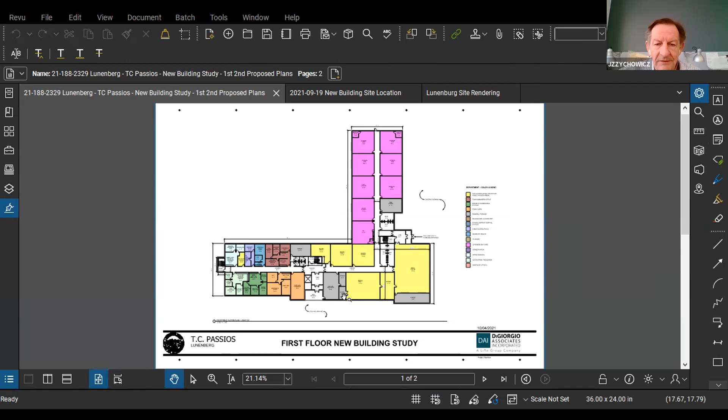Okay. So this is from the last time, we've got it drawn into the computer now. Got things tightened up a little bit. As we discussed last time, there were quite a few comments, but I was asked to focus on the low hanging fruit because we're trying to get an apples to apples comparison between the previous renovation of the school and this new building. So a couple things that we did add inside here: there was a request for a couple more bathrooms because these bathrooms here were going to be staff focused. So we added a couple more for the public side, so that if the public's down in the town area, there's a couple bathrooms here for the public. They don't necessarily have to walk all the way down to these larger rooms that support the meeting spaces. So we didn't add any extra square footage for that. We put them in, we slid the stairs over.

So this meeting room got modified a little bit, but it didn't affect the overall size of the building. So we did that on this level. And then we also did that up here on the second floor. We accommodated that. We turned the outdoor terrace that we had into additional storage to pick up some more storage area as suggested. Then I think that these were the only changes up here on the second floor.

Back downstairs, the majority of changes happened in the extended daycare wing. So what we did, we moved the ACE up front so that that adult program now is when you first come in off the entrance, the adult clientele can come right into this space. We added the bathroom, we added the kitchen that was shown in the previous plan. So now that happens right up front, separated from the children's program.

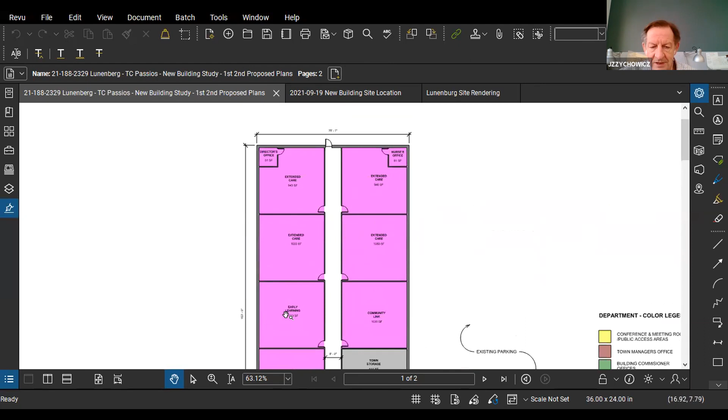2 of the rooms had office spaces within them. So now we're showing whether those are those 2 rooms or whether these office spaces need to be in these 2 rooms or whether eventually they all need an office space. I think the key is that we have all the 4 spaces here, all in one area. So it kind of goes adult, a buffer zone of storage, and then kind of the kids zone in the back. So we've made those revisions to the plan.

I started to go through and just kind of do a check. Right now, total building square footage, we're around 58,000 square feet on the 2 floors of the building. How many? Can you say that one more time? I'm sorry, say it again. Can you say how many square feet one more time? Oh, 58,000. Okay. Now I think we're pretty much spot on in the town. I think we're a little bit larger in some of these conference areas. So I can go back and trim some things up.

Like in this block right here, I know the Lions Club is too big, but this room is too small. And these 2 storage areas are a little undersized. So that's just a manipulation of these areas. I'll make this Lions Club a little smaller. I'll take some space out for storage and give the meeting room so we're a little more in balance with the previous plan. But I think overall square footage, we're okay. I can just fine tune this a little bit here.

This meeting room is a little bit smaller, but then the meeting rooms upstairs are a little bit larger. So I don't know how much you want me to go back and trim some of these things to match that original school building. Like I said, some of this is a matter of we're just stacking things now. So we have the square footage from the first floor to the upper floor. Like I said, I can go back and trim some things up.

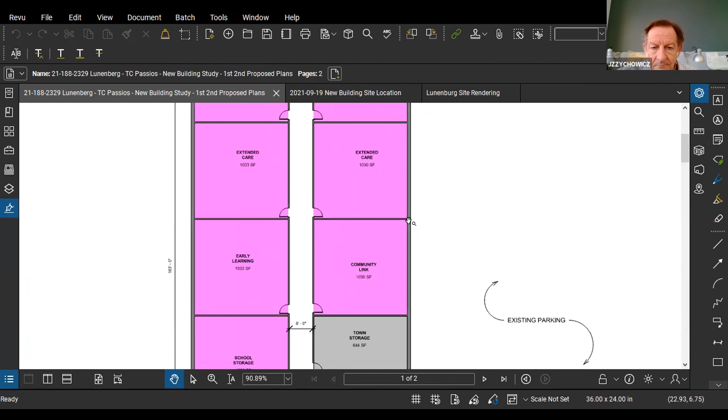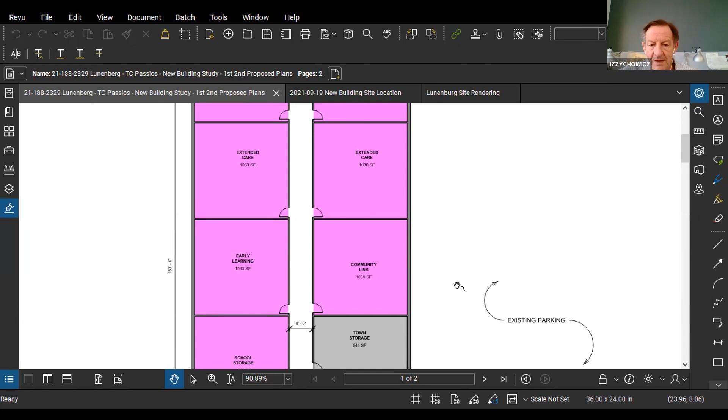And then the same in this wing, like this community link room, I think on the previous it was like 989. Now we're at 1030 just because of how we squared off the building. So, is it important to get that, say 40 square feet out? You can tell me and I can try to do that if you want. I can trim these things up a little bit to get it a little closer to apples. I mean, I think it's pretty close to apples, but that's a question, I guess, that we can discuss. So that's the updates on the building plan.

So why don't we have the discussion on the plans first before we move to the site. Okay, let me do this a little bit more systematically this time. I'll go through each person individually, so we're not doing a round robin thing. So in no particular order here, I'm just going to start at the top. Dave Passios, do you have any questions, comments?

Yeah, just an initial question. I'm assuming some of the extra square footage is because of stairwells and an elevator space that does not exist in a single story, three-wing building. Right. So, that's just part of the operation of this building and the configuration, I should say, of this building.

I understand the desire to shrink it down to probably closer to 55,000 square feet to match the other building. But there are some reasons why there's a little bit more in this design. And I'm not sure how much we would gain, but maybe shrinking all of the education rooms down so that wing is shortened, and then see if there's anything else that's doable, as we had a brief discussion about last meeting, about shortening the other wing also.

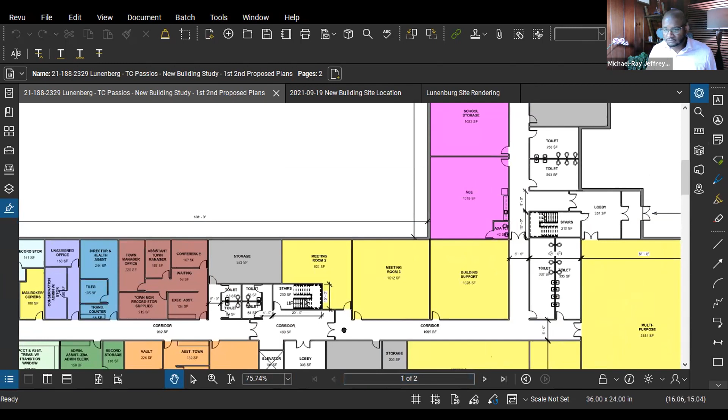And then the last comment is about staff toilets. So if we go to the education suite, one of the things. I'm sorry, do you mean the school offices? No, the ACE program and all the after school stuff. The purple. Yeah, the purple. So one thing that I think would need to come in here is inside of one of the extended day rooms and inside of the early learning classroom, a small bathroom.

And that would be a staff bathroom. Although there are boys and girls bathrooms in that part of the building, typically there's no mingling of adults going into bathrooms with children. And so in early ed, that way the staff can run to a bathroom and you don't lose your ratios. And then also just in general for there to be that staff bathroom in that wing. So in one of the extended daycare and in the early, would those be accessible from the hallway? No, accessible from inside the room. Inside the room, okay.

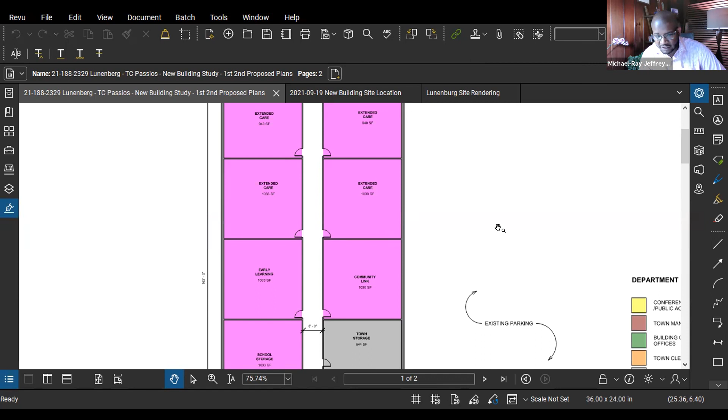So Michael, if I may, most of your suggestions really haven't changed the square footage. It's just shuffling adjacencies around a little bit. Correct. Yep, that's it. Otherwise, I really do think that the job you did here is quite phenomenal. It really is. I know that last meeting, it felt like we're all over the place. So I want to give you some strong kudos for being able to take all that info and put it together in a format here that makes a lot of sense. So thank you very much for that. No, thank you.

Okay, Brian, you are next. Thank you. I also really like the design. I didn't have any concerns. Okay. Dave Blatt. Okay, I understand the difference between the 58 and the 55. We had a long discussion last night and there was a big idea of apples and apples. So I don't know if anybody's going to get wrapped up on that 3,000 extra square feet. I think you did a great job with laying things out and putting things where they need to be.

I guess the only thing I have, if I had anything, would be the building support room at 1,000 square feet. I know it's there because that's a good location. However, do we need it? From your experience, do you foresee needing that much room in a building support room? Or could it possibly be where storage is on the first floor and meeting room 1 is on the second floor? I think it's meeting room 1. Hold on. First floor, second floor. Come on. Yeah, so it's storage on the second and meeting room 2 on the first.

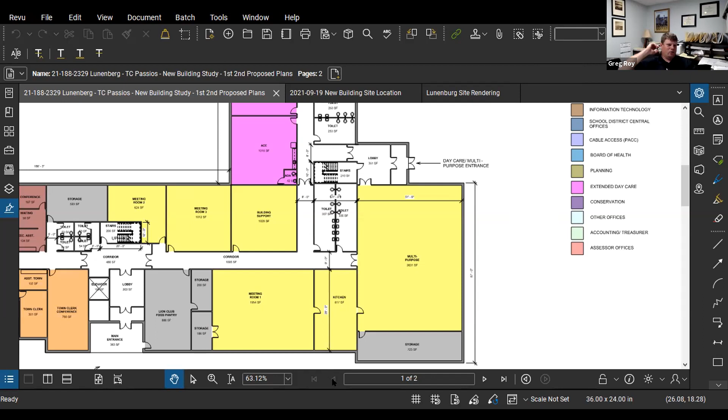Okay. Yeah, I think I agree with pretty much everything that was said. I definitely agree with the sentiment that we look to flip the town manager suite. But generally speaking, I really concur with the statements that I think this is a really thoughtful plan. Even the first sketch you gave us 2 weeks ago, I thought was really good. And I think it really handles adjacencies well. I think it gives us flexibility in the future in a way that we didn't have.

I think there's spaces that could be converted to other things in the future. The ability to put a second floor on the first floor wing is huge. So I kind of concur with all that. So I really don't have any other comments to add on this portion of it.

So, Greg, could I have one more real quick exchange? Yeah, go ahead. I'm just wondering, John, I'm sure we can look it up in the archives of the first go around with this for the renovation. But do you know if the multi-purpose area, storage, and I can't quite read what's up the other end of that, but that space is equal to or larger than the gymnasium and stage area in the present building? Give me 1 second here. I got the plans right here, 3.7.

It looks like we're within 100 square feet of the multi-purpose room. And the storage room, we're actually 100 square feet larger, so we're pretty much spot on. Between the gymnasium and the stage area and so on. Yeah, the multi-purpose room before, the gymnasium, was like 3,700 and looks like we're like 36. And then the storage was 650 and here we're like 723. So I think overall we're pretty close. Maybe the storage wall moves a little bit when it gets fine tuned in the future.

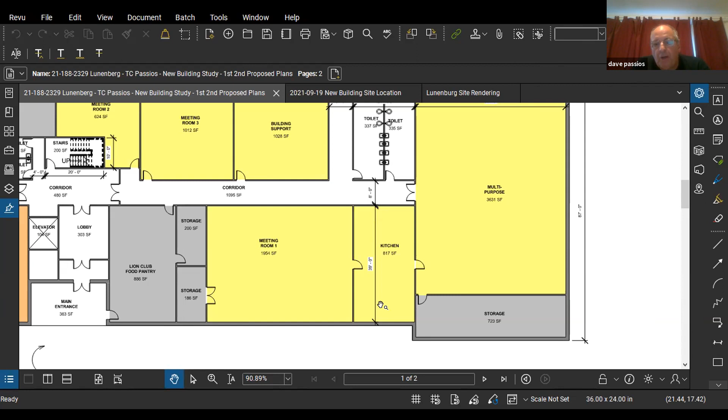But John, also, I'm assuming it's in the notes, but just to verify it, the kitchen in the original estimate was infrastructure only, not equipped. Okay, yeah, we were going to do the plumbing for it, but we weren't going to stuff it with the equipment because we know that's a costly thing.

If I may just add to that, the only exception is likely going to need to be the range hood. Typically, as you know, Mr. Roy, there's a whole bunch of makeup air calculations. There's a lot of mechanicals that go into those range hoods. And so it's better on this end to plan and design for a range hood than to try to do this after the fact, especially since it will likely require supplemental air handlers and everything else. So I would say, even though it's not equipped, it should have a range hood.

Yeah, that's fine. I defer to the experts on that for sure. Yep, and that's one of the reasons why I left this roof space above it, because like you just said, because you have a range hood, there's probably some special exhaust and some things that need to get situated just above the kitchen. So that's why I was leaving this roof space above it. And there shouldn't be a door there, but yeah, just space to locate equipment.

And then, depending what type of equipment is in the kitchen, you're probably going to end up with a grease trap somewhere that we'd need to locate. Those are all things obviously in the future design. I think that door actually is probably appropriate, so that way there's roof access from the second floor. Yeah, I was just thinking that. You're right, that's probably not a bad idea. That way you don't have to go to it from the outside. We could access it in case some repairs are needed. Very true.

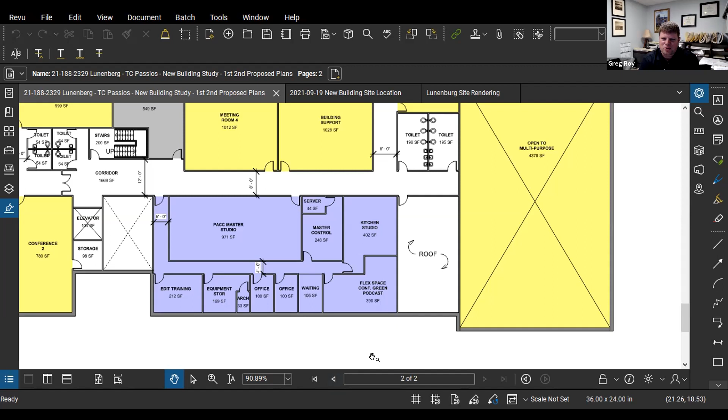Good eye, Mike. Okay, I was thinking that same thing actually. Okay, anybody else? I don't want to fast forward this, but I feel like we're getting somewhere here. So it seems to me that we have a few small tweaks like flipping the town manager suite with Veterans Affairs, VA, and then adding some bathrooms, tweaking the door configurations here and there, but yep, some label changes on meeting rooms and conference rooms.

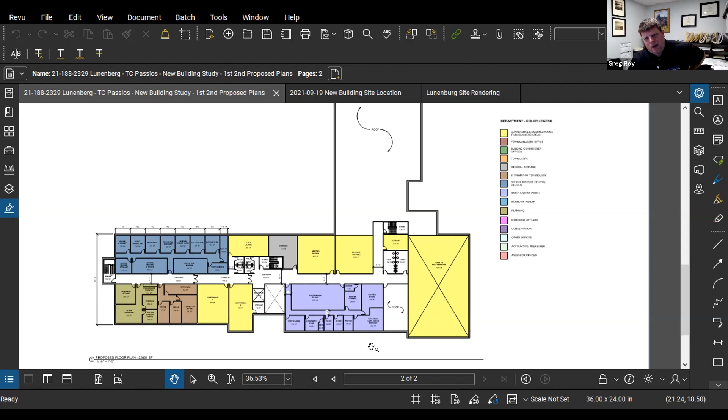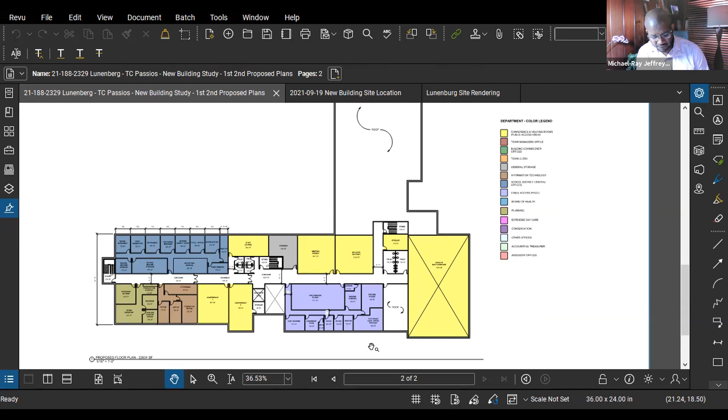So if anybody feels like they are at a point that they could formulate some sort of motion, I would like to give John, if we feel like we're positioned to do it, perhaps a conditional approval, conditional on those items, if anybody feels that is appropriate. Yeah, I'll go ahead and make the motion. Go ahead. I move to approve the design layout as presented with the discussed modifications. Second. Okay, any further discussion?

Okay, I will take a roll call vote. Dave Passios, aye. Michael Ray Jeffries, aye. Dave Blatt, aye. Brian Layden, aye. Christina, aye. And an aye for me. Awesome, thank you. Okay, in the spirit of moving this along with John, let's hop right into the exterior.

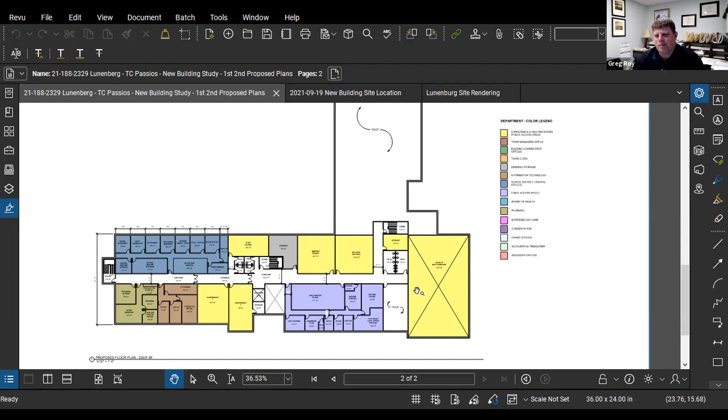Right, so the last time we looked at this sketch where I overlaid the new building onto the footprint of the previous building, just to start the conversation, we talked about keeping the same amount of parking that was shown on the previous site plan, taking that unfinished lot that I think is up in this corner, paving it, creating a loop road around, looking at parking for staff so they could come in through this stairway into the town offices. There was discussion about limiting parking in front, maybe getting it down this side road here.

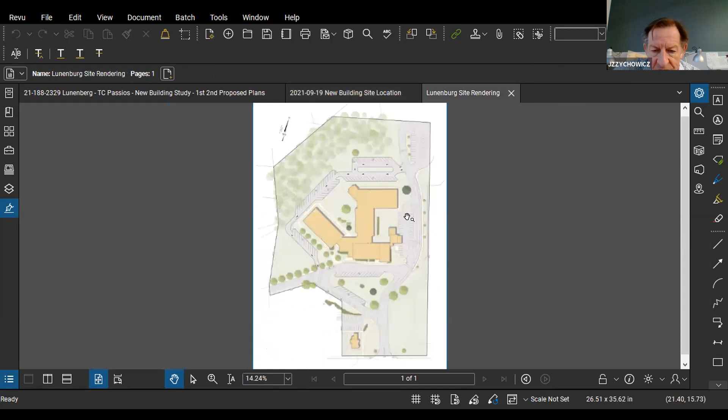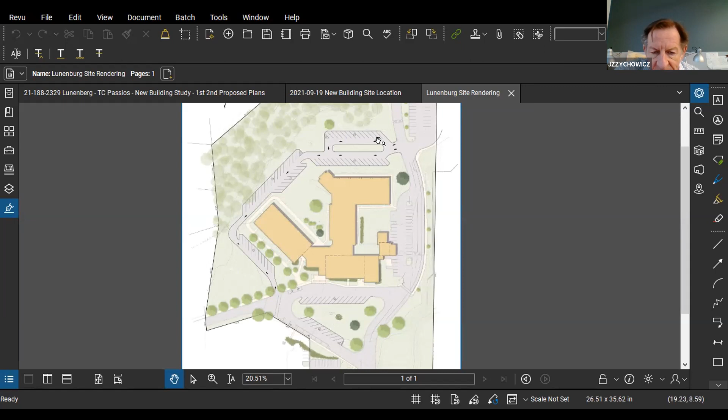So what I ended up doing is pulling the site plan from the previous submission, which you can see here on the screen. I believe this is somewhere around 153, 155 spaces, something like that. So I just wanted to run through it. This lot up here is where I think the unfinished lot is now, and that's showing it being finished with parking, a loop road with some spaces coming down here.

So these two lots are where I would like to see, when I speak to the civil guy, we could probably keep some parking along here, but I'd like to see if we could get a little more parking closer to this entrance so that staff have a place to park and they could come in through this door here. So modifying, because this wing isn't here anymore, combining these probably, if we can, into some kind of a parking lot that's maybe up here and bends that way a little bit, so we get a grouping of staff parking here.

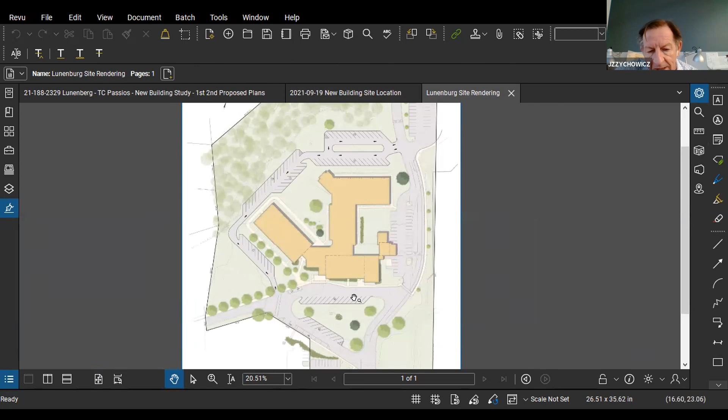Now, looking at the remainder of this, it looks like there's some parking already shown on this road that we can replicate. There is some parking shown at the front of the building, and I know we'll need some handicap spaces there. But I wanted to have a discussion, because it looks like there's 15 spaces here in the front. I'm not sure if there's room to move all of those out and still maintain the same total.

And then there's the discussion over the outdoor child play area. What I was thinking of, I'm sorry to be bouncing back and forth, but we have the 4 extended daycare rooms up in this corner. So I was thinking 2 of those rooms could egress directly out if we had a play area right in the back, and the other ones could come out the door and then come over into that play area. So I would think back behind this building would be a great spot for the children's play area.

And if we have this loop road kind of coming by, it kind of creates a protected area back there. So I think that would be a good spot that I can give direction to the civil guy, our civil engineer, to kind of look at that. So those are my thoughts as far as like this space could stay. These areas I'd want to reconfigure closer, like maybe get a double stack parking here that also kind of angles off, so we get a good grouping here for staff. Children's play area here, that surface lot gets redone.

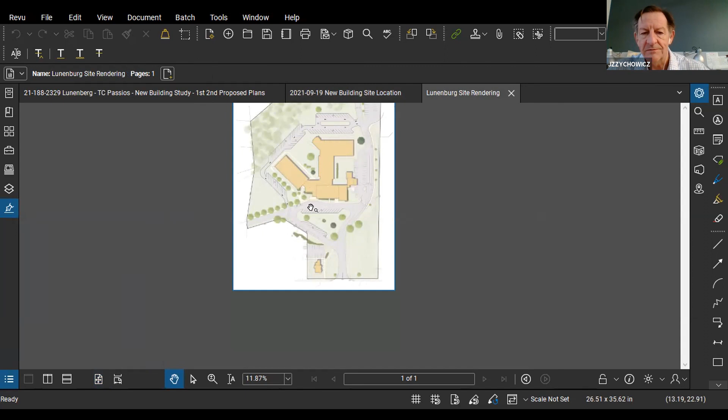Now whether we make that a little bit larger and maybe some of these spaces come back here. I guess the discussion more is around the comment that was made about not having too much parking in front of the entrance, because it looks like we have 15 spaces now, and I think we will need some public space, because if this is going to be staff here, we can't have all the public spaces here, I don't think, and force them to walk over to there. So I guess I want to revisit that conversation. Hopefully that wasn't too confusing. No, I think it's good.

So I'd like to start on this one if I can, folks. I had an hour today and I doodled. Oh, fantastic. Can I share my screen? Yeah, I'll stop the share here. Thank you. I love when people doodle. Multi-million dollar doodle. Well, we'll be the judge of whether that was good or bad. I'm not looking for extra credit on this. It's never bad. Any kind of a sketch, thought, doodle is always a good thing to me. Can you see? This is more than a doodle. Wow, this is so fantastic. I was literally just brainstorming.

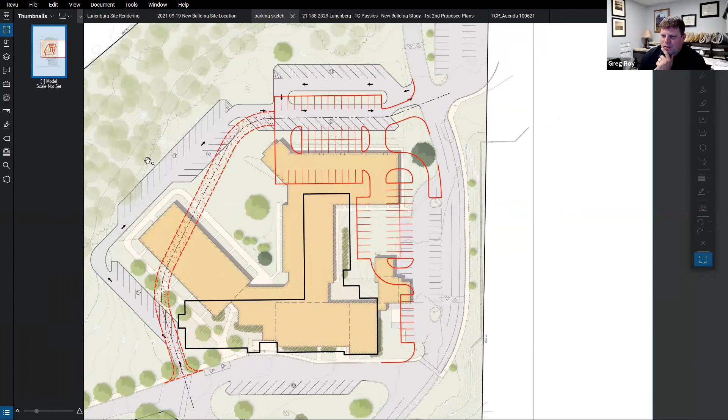So I took the old rendered plan and I dropped the new building on there. It's scaled, so it's probably not perfect. And my thought here was, there's enough room between this wing to add a double bay, this existing parking, and add another bay here, and still have room for green space between the building. And then I think there's a lot of room up and back here to just put a big old parking lot that would not only function as parking for this building, but also as overflow parking for the school facility, which is right across the street.

So then I just quickly threw a connection through here that I thought could be gravel. You could pave any of this and put parking next to it if we decide we want to, and we could reconfigure it, but it's just showing that we need to have a loop around the building, but not necessarily a loop for everybody. It could just be an emergency access type loop, to save costs, in my opinion. So the red spaces here net us 77 spaces. Not including the ones in the infield, we had 68 new spaces shown in the areas in gray. So if we removed all the gray and did the red, we'd go from 68 spaces to 77 spaces in that area.

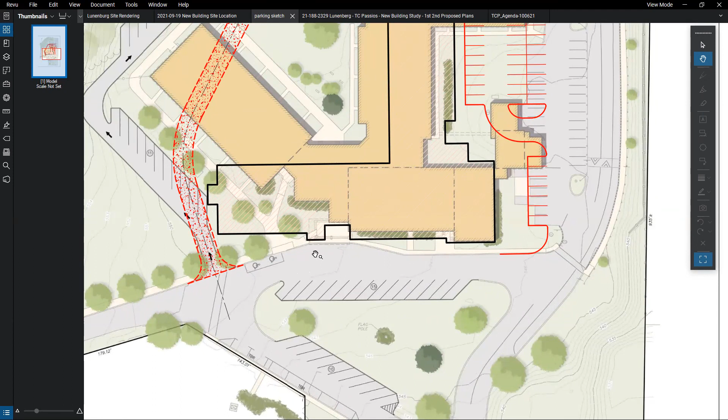Yeah. I don't know if it'd be something possible where we could maybe put just handicap on that front side, so it's very minimal parking, because as Mr. Jeffries said before, this is going to be a building that we hopefully have for a while. So we want it to be aesthetically pleasing. We don't necessarily want to junk it up, like when someone wants to use it to take pictures, that there's going to be a ton of cars in front of it. So I don't know if there's a way to make sure it's handicap accessible without overloading the area. Yep.

Keep in mind also that, in the original design on the renovation, we created a parking area right up against the building on that entire west wing. I get the concern about the ability to be photographic, if you want to call it that, for the front side of the building. But a functional office building has parking right up at the building and as close to the main entrance as possible. You got to look at it from that perspective also.

Aesthetically pleasing, probably not as great as moving parking away from it, but you still got to think about what distance people are going to have to walk just to get to a door, to get out of the weather, to get into where they're going.

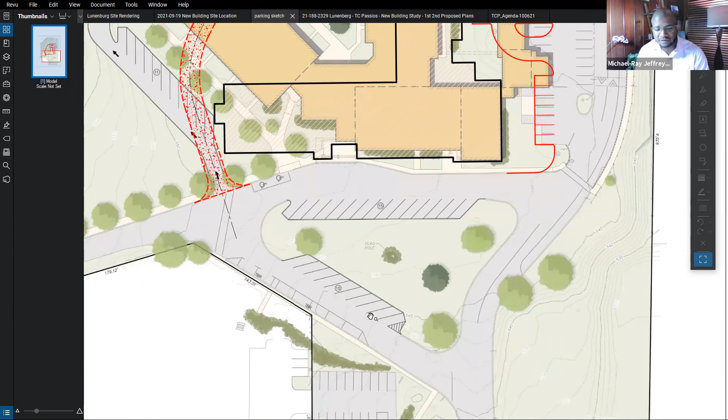Okay, Michael Ray. Yeah, so I'm not in favor of any parking directly in front of the building in that area at all. And I think it is about the appearance of the building. Also, this area has been used this year for band concerts, and I think we maintain that capability in the future if we leave it around the same size. And so not having that other parking on the north side, I think, just makes the whole thing work better. I agree with leaving those handicap spaces in front of the building.

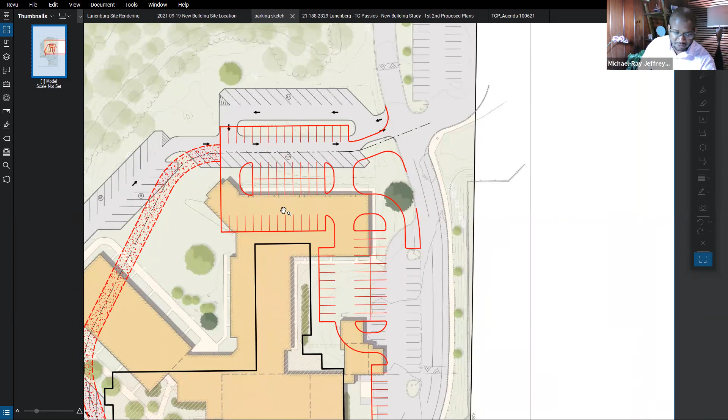As we look at this back section though, in this area of the L, where Christina recommended putting the playground, I would actually recommend putting the majority of the parking there. I think that's prime location for a parking lot. It's a little more hidden. It's close to the staff entrance, so you have enough staff that can park there. I think that would work well.

And then as we look at the child area, I would leave that as close to the school side of the property as possible, and away from the parking area. So yeah, right where your cursor is, exactly. I would put that to the right, maybe a little more. Yep, northeast corner. I think that would probably be the best location for the kid area. It would be somewhat hidden as you look at the building directly on. It's also away from the public using parking areas.

And then I would keep a small lot where you have it shown, Greg, on the bottom right. I think it's the existing one, actually, that's already there. Further down, yep. I would keep that small area there.

And that provides, I think, additional parking when there are building needs for staff to come, be able to park there. If you have someone that's working in the kitchen area or getting any kind of food deliveries, you need to have that. So I think, Greg, what you did was actually really great. I would just shuffle it around a little bit.

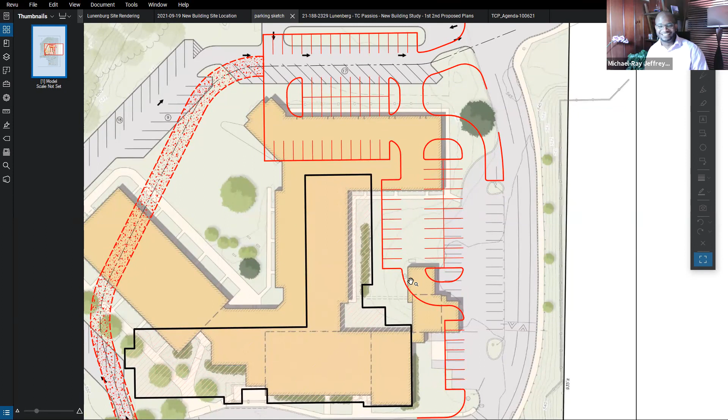Well, yeah, I didn't iterate this at all. I just drew lines, so. Yeah. Okay. Was that clear, John? Were there any questions on that?

Well, if you put the parking back there, does that mean we now have to create an entrance in the back, because your entrance is out front here? And I'm still concerned about public getting into the building, you know, parking. I mean, can we put parking to the left of this gravel road down where these trees are? Yeah, and again, don't take this as gospel. No, but I'm just asking.

Because I do think there needs to be some parking available for people that are coming in to pay a bill or something. Yeah, absolutely. You don't want them to have to park in the back and then have to walk all the way around to get to the front door. My thoughts after hearing the discussion are this.

First of all, I think it would probably make sense to move the building maybe 15 feet back. Because I don't think it makes any sense to reconfigure the road that we have here. It's a perfectly good road. It might need resurfacing. We're crowding the plate here a little bit in the front, so I think to have more of a plaza here would be good. I think we have the room, we could shift everything back 15, 20 feet. We could move parking back 15, 20 feet, and that would give us some more breathing room here.

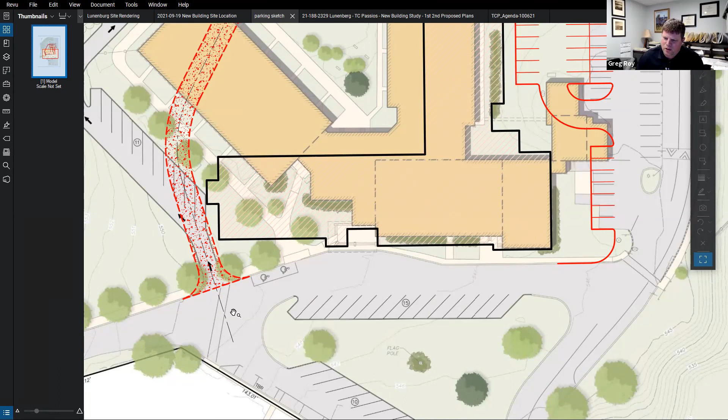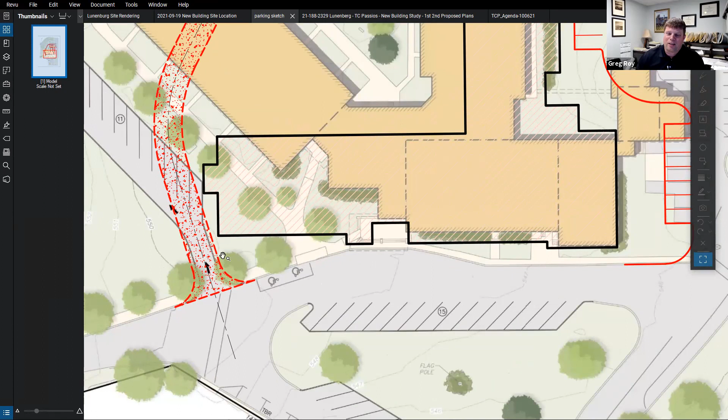I positioned this road in this area remembering that Meridian, which is a civil engineer, was really interested in aligning this road with this intersection here. But it doesn't necessarily need to be that way. You could move this over. You could put double barrel parking on both sides. You could put probably 20 spaces right here. And that is not that far of a walk by sidewalk from here over to the front entrance of the building. Yeah, that would be good.

Yeah, if we could put it there. You could have 2 handicap spaces or 3 or whatever we need by code right here, closest to the building, you'd have your accessible route. And that might mitigate concerns with parking in the middle. I like that idea, when we're gonna have to build this area anyway.

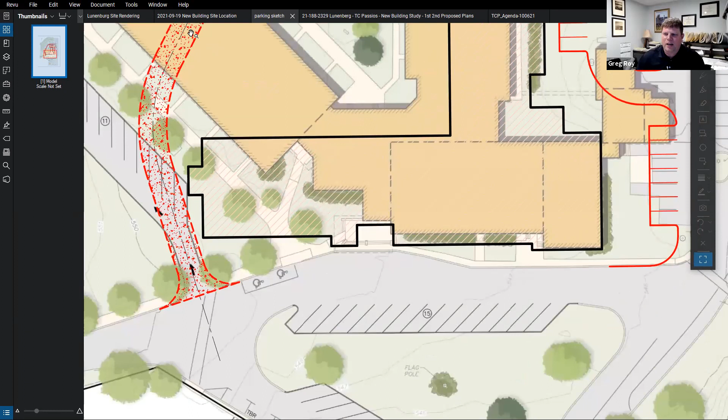So from a cost standpoint, I'm guessing here, but these are probably going to cost more money per square foot than these, because we're already going to be constructing in this area anyways. Here we have to rip up curbing, we have to prep it, when it's already natural green space. Right. And if it is green space, I think it'd be nice to leave it that way.

Yeah, and so I kind of agree with that comment that Michael Ray said. I'd like to see it at least off to the side, and it seems like we could accommodate that. And pushing this back, I think, is a great idea because that gives us a chance to create more of a public arrival space, little terrace out front. People were talking before about photographs. That would just make a much nicer entrance into your town hall.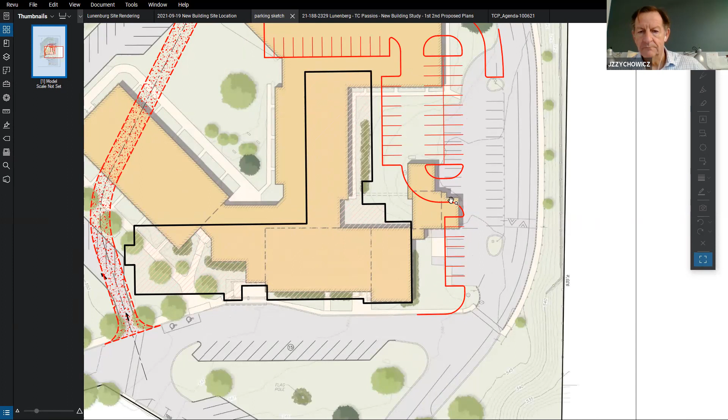Yeah. And the way I configured this, this could also be a plaza area right here. So you come and there's a drop off, right adjacent to a concrete plaza area where you can have a nice gathering space or a vestibule maybe someday. But that's enough for me. Dave, go ahead. Dave Blatt.

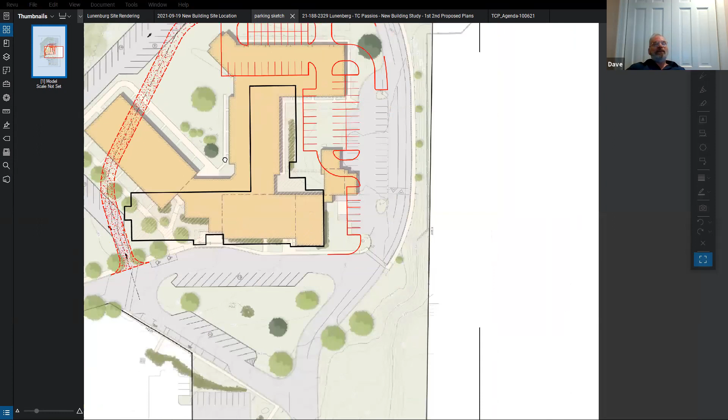Okay, so looking at this thing, I like your plans. The only problem, now that I look at it, is the staff wing: there's no good place for parking because there's no entrance on the left corner right now.

They would still have to, even if you have parking there, they still have to walk all the way to the front entrance. Well, they could come in through the doorway. They could come in through the stairwell. Yeah, we could have. But you're saying a doorway there. So actually, looking at this, I like the parking plan.

However, is there a way of flipping the 2 sides? In other words, taking the whole staff side, moving it to where the school side is, taking the school side, moving it to where the staff side is. So this way, the main entrance to the whole building and everything would be where all this parking is on the front, on the right-hand side, as well as the back. And then you have the whole back behind the building to be a play area, a courtyard, or everything.

Because if you're looking at it as the school side doesn't need parking, it just needs more of a drop-off area and maybe a short-term parking just to pick up a kid or go in for something. But it's really the town side and the office side and then the multi-purpose side that needs all the parking. So I hate to say this, I love the plans. However, is there a way of kind of flipping the 2 sides? And that way you would have the parking right in front.

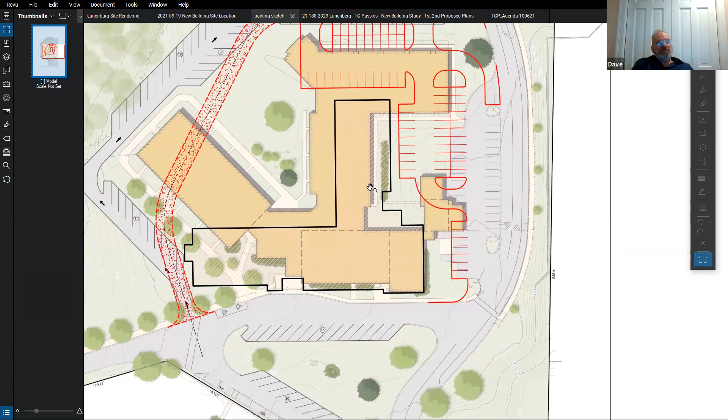I do agree with that. However, that's the same thing. How do they get in? If there's a doorway in the stairwell, which I didn't notice in the plans, but maybe I just didn't see it. So there's no doorway in the stairwell on the left right now. But if there's a doorway in the stairwell, they can get into that side. If not, if you have staff parking behind the building, they have to walk all the way around to the front to get in in the winter.

Now, granted, town hall, I don't know where they park now, because there's no parking. They don't know where they park either. They park at the teen center. Right, exactly. They have to walk from there. So maybe I'm just splitting hairs, because they could all park in that section on the right and walk in over there.

And by the way, the other side of that is in the building. I know we agreed on the building, but if you move the doors by the stairway back further to the other side of the opening, you're still cutting off the school from the town, but now people can come into that section and walk into the town side without doors. I don't know if that made any sense.

Yeah. My concern here is where does the staff park? You could get probably 30 more spaces just by doing this. Okay, that's fine. That's pretty much enough for the staff. And then you could have a walkable path into the back door for staff. And you could still have area to put a play area here, and you could remove these and you'd end up with a net of roughly 10 more spaces than we had drawn in the previous plan, with no additional parking in the infield.

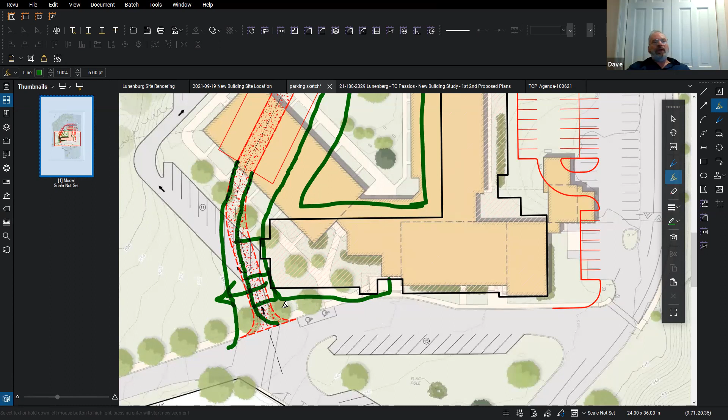Okay, so that gets me to the point, your handicap parking and handicap entrance is really on the right. But you could also shift this even further and put a bay of parking in there, some of which would be handicapped, and the accessible route is that way. I understand, but if you look on the right-hand side, you have those seven spaces right there. If that was handicapped, and you went back to the plans, you would have to move one set of doors, and then that could be the handicapped entrance into the facility.

Yeah, but this is gonna be an accessible route, and this is gonna have to have an accessible route too. You're gonna have to have handicap spaces with an accessible route into both doors. Correct. So do I have to have spaces near both doors? Yes. Okay, that's fine. My point was just more for staff parking. No, I understand that.

And again, I had a picture in my head and I drew it. And by the way, I agree with the comments about the spaces in the front, because right now, 10 out of those 15 that aren't handicapped will be taken up by staff. I can guarantee it, because it's the shortest entrance to get in. Unless they're told not to. Well, you can do like at our town hall, where I think they have an hour time limit on the spaces, so staff can't park there all day because they'll get ticketed.

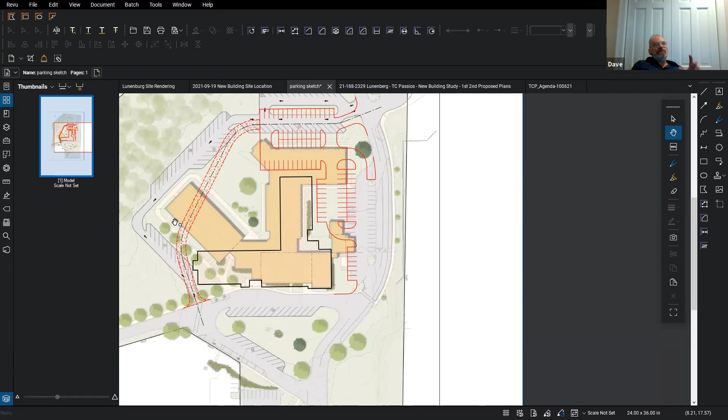Mr. Chair, if that's the case, why don't we just leave the parking as is, eliminate the spaces in the front and call it a day? Yeah, if you eliminate the spaces in the front, we'll have to add some more, because you will need some spaces along here for the public. But this was just a starting point, I would imagine. Yeah, we could easily add some along the edge here to provide for some public and some staff, and the majority in the back and the rear. I'm just trying to make this as simple as possible, because all we're trying to do is get an apples to apples comparison. Yeah, that's my point.

I definitely think, if we're not gonna do parking in the infield, we definitely need parking on the side and or back here, for sure. Yep. We need to make up these 25 spaces because I didn't accommodate them in my sketch. So we'd have to do that. Again, it's just a quick thing. So, Christina, go ahead. Sorry for the wait.

No, I was just gonna say, it's kind of negative, I guess, but I don't know if we need to put this much discussion into parking if it's probably going to change once the building gets approved. If we could just find a way, without changing everything over, to add a few parking spots for the staff and call it a day. But it seems like they got to that point already.

Greg, I'd like to see us adopt your layout with the added spaces off the corner of the wing, down in here, to make up the ones we lose in the front. Leave the front island though, leave the spaces, as Christina mentioned, closest to the library. Take out the ones in front of the main entrance. Add those in beyond the corner, and then have them design it that way. That's the closest to apples to apples that makes sense for the shape of the building that's going to be designed. And then let the building committee fine tune it later. Okay. Brian has his hand up.

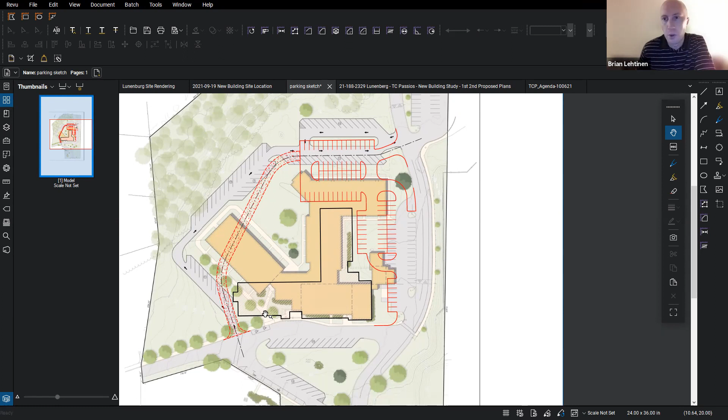Go ahead, Brian. Thanks. Yeah, I would agree. I think apples to apples is always a good way to go. But I do love the idea of, again, leaving green space, making sure that the employee parking is a decent, small enough location near an employee entrance or any entrance, and keeping it away from the children area. And then just minimizing the parking out front. Okay.

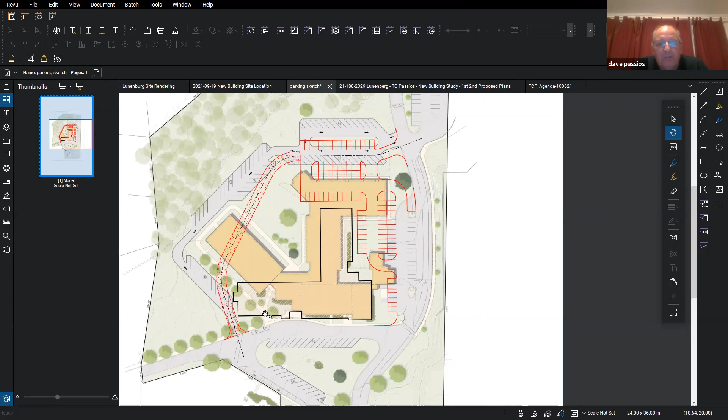All right. So I'd make a motion actually to adopt what Greg has here on the screen in red, with removing the spaces on the front island closest to the building and adding those spaces somewhere on that access road as it swings around the back end of the wing. Again, it's going to get moved around, as long as we get our handicap spaces accounted for properly for the entrances. That's the best we can do with an adjusted parking layout right now. Would that include shifting the building back too?

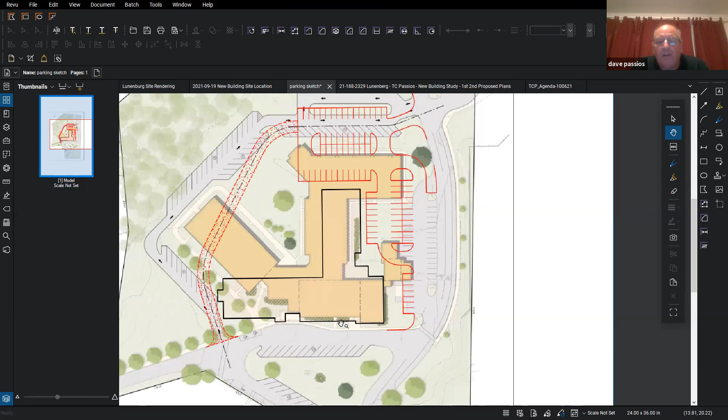Yeah, I think so, John. That would work, right? Yeah, we could. I like that shift back. I really do, because it pushes it back towards the existing parking lot anyway. I just have a question. So that means the child area will have to go to the left, right in there somewhere? Yep, right in there. For this go round; it could move later on. Okay.

Okay. That was a motion. I don't know if we got a second. You made a motion, so if there's a second, we'll discuss it. I'll second that motion. Okay. Is there any discussion? Yes. Go ahead, Mr. Jeffries. Yeah, I'm not in favor of the motion.

I understand that we're gonna have more time to talk about this, assuming that there's more funding to talk about this. What my concern is, I don't think apples to apples is necessarily the exact same parking layout. I look at it as, so long as we have roughly the same amount of parking spaces, I think we've achieved the apples to apples.

What concerns me is that although we can have these discussions, ultimately there's going to be a presentation at town meeting. And it's something that people will get stuck on, in my opinion, looking at a map that shows a child area surrounded by parking lots. While we understand that may change, I think it's the question of, well, why not just change it? And why not just not present that to begin with? So I can't support the child area being surrounded by parking lots. And I can't support this large parking area in the direct area of the child area.

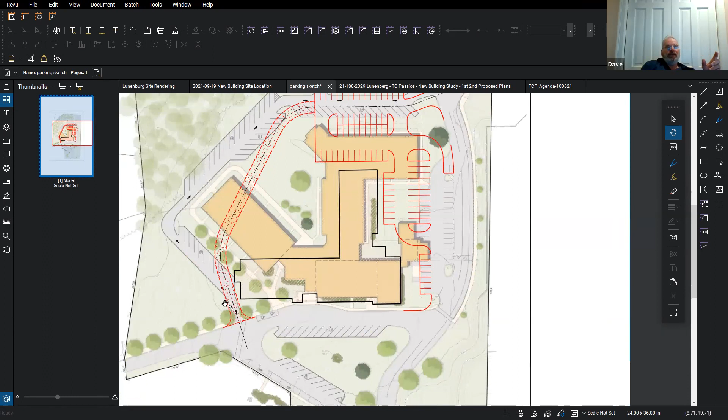Okay, anybody else? Yeah, Mr. Chair. Go ahead. Mr. Chair, Dave here. Yep, go ahead. So if I look at that, I appreciate Mr. Jeffries' comments. Is there a way of taking that lot that you've made on the upper side and just putting it on the right side? Over here? Yeah, it could. It solves the issue of staff parking. It solves the issue of getting things away from the kids. And it just makes it easier.

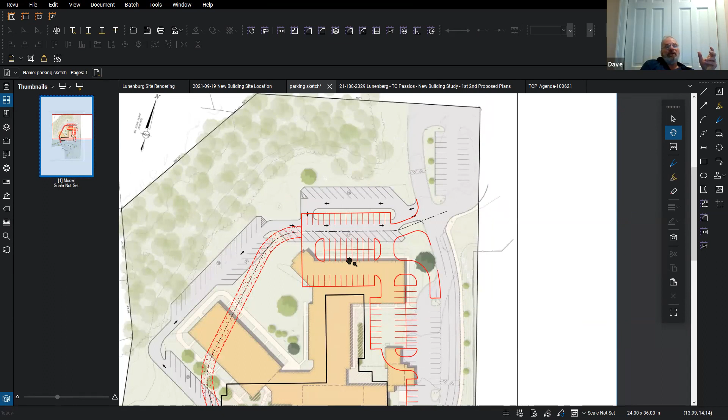The other thing you could do here, sorry to interrupt. No, that was just as simple as that. I agree that everything is bunched around the kids right now. And that was one of my reasons for saying, do I flip the two? And I understand that we already approved things, but it's a matter of what makes sense at some point. So if I could just offer a suggestion, perhaps a way forward. Sorry, Christina, I see your hand.

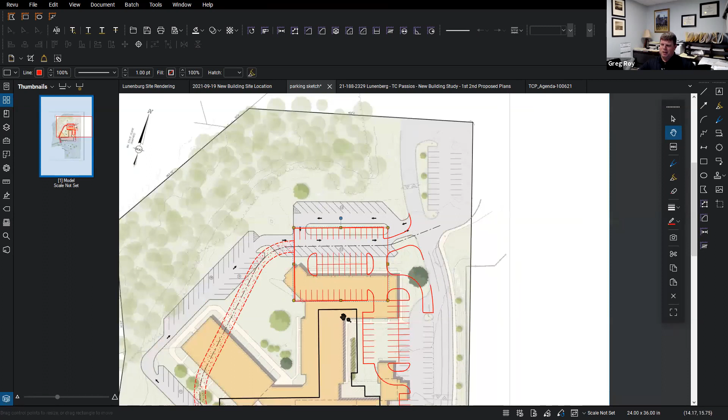There's tons of room up here. If we shift the building 15 feet, you're talking about shifting it from this black line to this red line, so not far. The distance between this red line and the center of this parking is like 65 feet. So we could take this whole parking bay and move it like that and still sort of achieve the same thing. You create a green space in here.

My argument is this area is going to be used for parking because it's used for parking now. Unless we take it out and put grass there, which I just can't imagine the schools being in favor of, because this is used for school parking today. So there's gonna be a big parking area here, in my view, unless we literally make it into a field. So we could just move this away from the building, get a little bit more green space here. It doesn't help the fact that now the parking spaces are further removed from the building, which were the comments that we had before.

But if we did that and we had more spaces on this side of the building, that would give us more flexibility for where we put a play area. You've also got to remember that we don't have a play area programmed into the TCP renovation project. I think the assumption is they're just going to keep using Kids Kingdom like they do now. Yes. So that's a nice-to-have, but it's also not something that we really talked much about, if at all, during the TCP renovation.

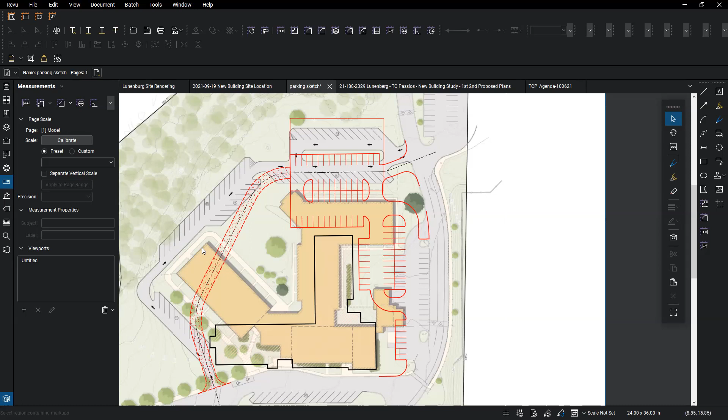Yeah. So if there was a way to extend the parking like you did, because that looks great, remove the parking behind the fire road and just keep the staff parking on the left, almost limited, maybe a few short-term parking spaces, then that highly limits the parking and their exposure. I agree with everything Christina just said.

Okay. If I could ask John, maybe, ultimately, whatever layout you do for parking, is there anything that we've talked about here that is outrageously more expensive or cheaper than the original layout? I mean, it's semantics as to how you lay it out. I think the dollar amount's going to be about the same either way.

Yeah, I mean, I think it makes sense. Where Greg's showing, expanding the parking on the east or right side of the building, I think that makes a lot of sense because you already have parking here. So to expand that paved area, and you're going to take that gravelled area and resurface that anyway. So to move that back makes some sense.

Yep. And then it's a matter of where we pick up some parking. I think we need to get some parking up here for staff and visitors a little bit closer to the main entrance. I agree. Hearing about how you use that green space in the front, we should take those 15 spaces out and get them on the side here.

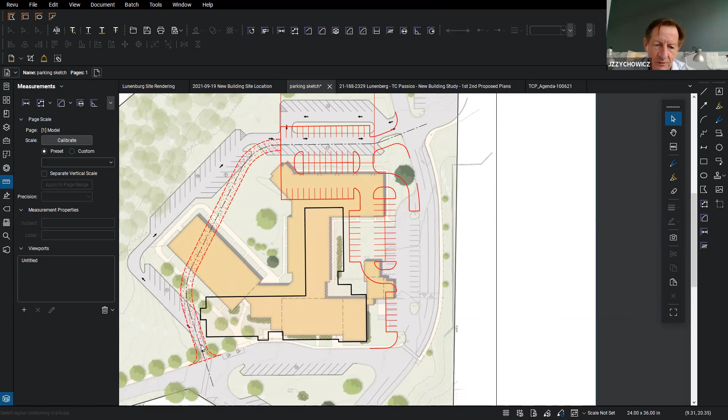So yeah. So whether the parking is shown as it was previously along the road, or whether it's moved, it's all the same. To build whatever the number was, 155 spaces, say, it's going to cost the same wherever you put it. So, oh, sorry, Brian. Okay. Go ahead, Brian.

Thanks. So I have to leave in less than 10 minutes for a school committee meeting. I also wanted to mention, I don't know if there's any way to avoid having an access road too. I don't know if that would alleviate some of the concern about the students, if the access road stopped on both ends, so that there wasn't a way that people were driving through, or does it have to go all the way around? I think we could do it as just emergency access only. But I think the fire department's going to want to be able to circulate around the whole building.

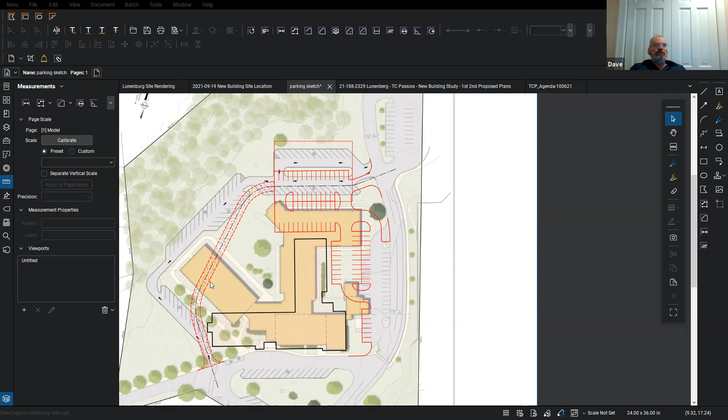So if that's the case, can you do to the left of the building a parking area, not in the back, but just to the left? Just do a parking area there. That would be, say, 15, 20 spaces. And then I would go with the modification of moving the parking on the top back a little bit, and be done with it.

With the access road just being a gravel or something that would be emergency use only. But that basically made it nice and simple. There's parking. If I'm explaining it to people, I have parking on the left to get to the building, and then the rest of it is parking for everything else. I agree.

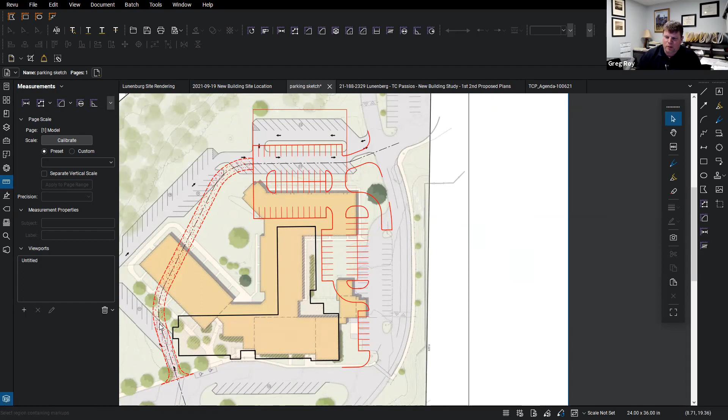Like I said, if we're not gonna do them in the infield, we gotta have them over here, in my opinion. Right, so if you can do just to the left of that, do like a little parking area. Or you could shift this over and do double barrel, or we can leave some of these decisions to the civil engineers. But I think if we give them guidance that we want 20 to 30 spaces over there,

and take out the 15 spaces that we have in the infield, closest to the building, that's probably enough guidance, and then they can come up with the layout. Yep.

Christina, is that new hand or was that from before? That was from before, sorry. Let me take it down. Okay, no problem. All right.

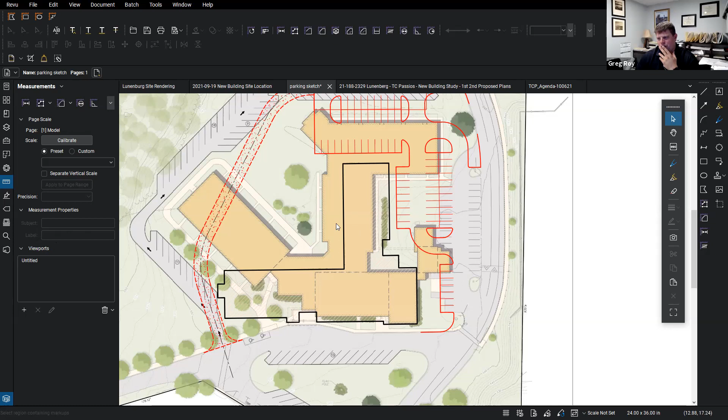I'll withdraw my motion. I think John has enough information. Unless he has any other questions, we really don't need to vote on anything until we get a plan. So just to summarize where we're going, John, and I will email you this sketch. I think what we do is we slide this bay back to sort of where I'm showing it. That gives us room, by the way, to slide the building maybe 20 feet.

And then we slide this over and somehow we get 20 to 30 spaces over on this left-hand side. And we take out the 15 spaces on the infield. And we keep these 10 spaces down here. I think that's what we're agreeing with. Am I summarizing that correctly?

Actually, Greg, if you're gonna add 25 spaces to the left, why bother to have either one of those spaces around the island? You just explained that's gonna be costly. Yeah, so we could just take those right out then. I would agree. Because to me, that's a traffic issue too. Somebody trying to back up into that road. Yep, that's fine.

And that's low hanging fruit in the future. If the town decides in the future they want to build some parking, they can pick up a couple quick spaces there. So I think it's everything that I just said, except that we'll remove both of those parking spaces. Does that make sense to everybody? Works for me. Okay.

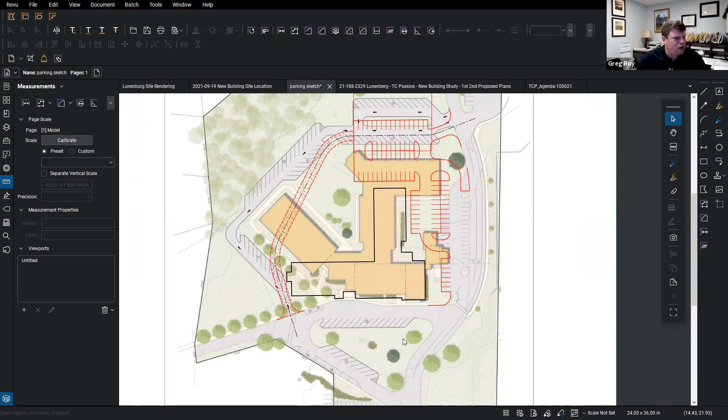All right. Is that enough, John? Yes, it is. Perfect. Okay. Thank you. I'll email that to you, John, after the meeting. Thank you. I appreciate it. I appreciate your efforts, Greg.

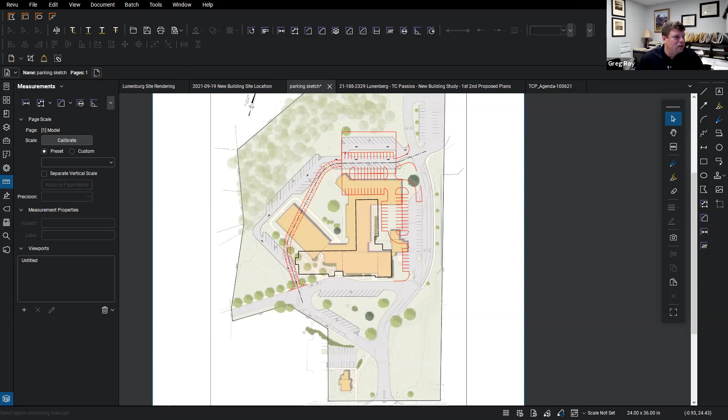Thank you. Well, I enjoy it, and like I said, a picture's worth 1,000 words. It certainly is. Yeah, by the way, Greg, thank you. We could have argued about that for another hour and a half if you didn't draw the picture. Well, I figured we're just gonna be pointing, and at least everybody could have disagreed with that layout, and at least it would have given us a starting point to disagree. Yeah, that was perfect. All right, so that's fine.

So John, I'll give it back to you if there's anything else, but I want to be sensitive of your time. No, I think we're in good shape. I'm gonna take another look at the plan. I think there's a couple things in there I want to shift around to get some square footages a little closer in storage areas and things like that. But in the daycare, extended care area, I won't worry about that, even though we're a little bit higher.

So John, just one quick thing. The double doors that you have between the school, the purple area and the yellow area. If you shift those to the other side of the lobby, the other side of right where the toilets would be. Greg, can you let me share again? You should be able to share again, yeah.

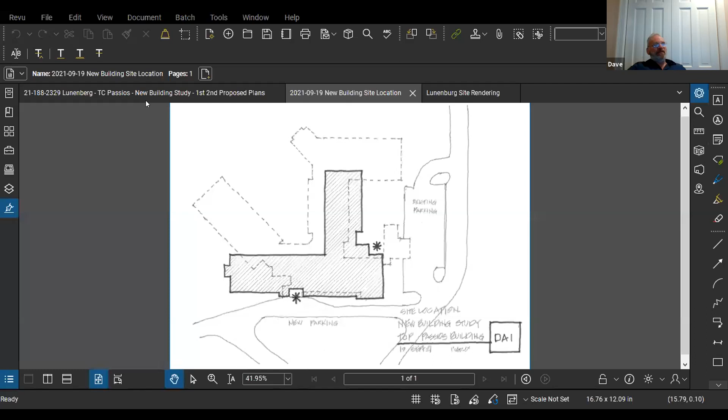Okay. You should be able to. And I hate to do this, but this, to me, makes life a lot easier. Hang on a second, let me get to the first floor. Yeah. So those two double doors right there, yep, move them back the 18 feet to right where the toilet is, the wall where the toilet is. Yep. Back there. That way now I'm blocking the school side from the general purpose side.

And still being able to, so you'd have access, it just would be a little bit better for the access, I think. Access for whom? I'm missing the point. You're still blocking the school side off completely. If it's not during the day, if it's during the night, right now if I walk in that entrance, I can walk to the school side, but not necessarily the multi-purpose side, the yellow side. Well, okay. I guess I missed that.

I might be going to a meeting room, because we just did the parking over there. So I'm going to park over there, walk in this door, and I'm going to want to go to the left. And that way I'm blocked from going to the right, to the school side. Oh, so you want to shift these doors up this way? That's correct. Exactly. So right here, and that way I can have this entrance. Okay, I got what you're saying now.

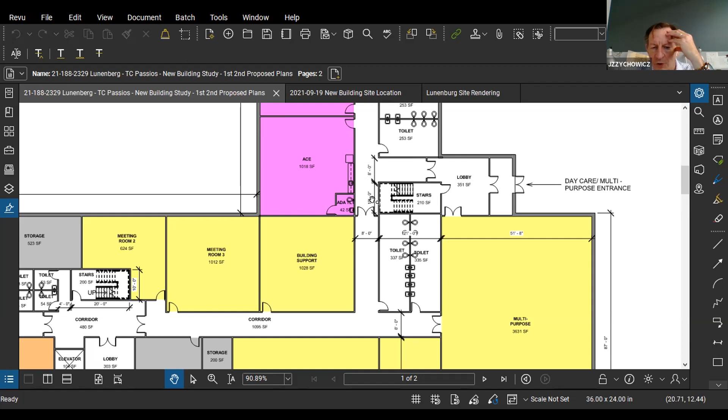Yeah, but I think then you'd need both doors. Oh, yeah, because people are coming in for the school during the day. You'd want to have a lockable door there. Why would you have a door locked during the day? So that you separate the town uses from the school uses. Because people coming in to use the school would then have access to this. Yeah, that's why I put this here, so people coming in during the day to use the school are blocked from going into the meeting space or the town side, if the doors are up here.

So I looked at it as the north entrance, the upper entrance, would have been the entrance for most folks going to the school area. But we could add a second pair of doors here so that at night, if there's a night function, this could get closed off. That's why I tucked this door here so people coming in at night could get right into the multi-purpose if you had like a men's league going on. Right, but they might want to come this way to the selectmen's meeting in the other room, because that's where the main parking is. Yeah, so we could add a second pair of doors here. Okay, that's it for me. Other than that, I liked everything. That was the only thing I thought of.

All right. Anybody else have anything they'd like to mention to John? Just one quick comment and question for John. If you're not aware, we have tentatively scheduled meetings every Wednesday this month, and we're hoping to have an informational meeting for the public the first or second week of November. The question is, how soon in the next week or two are we going to have enough new information to hash around like we have tonight to help expedite this process so that we're definitely done by the end of October? Oh, done by the end of October? I didn't know we were going to be done by the end of October. That's what the contract was, 60 days.

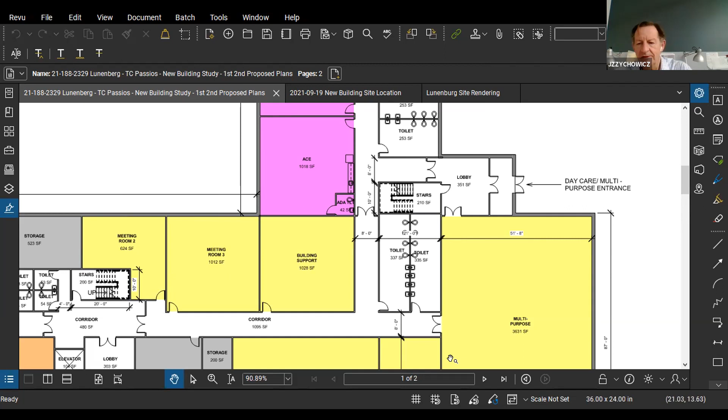Okay. Thank you. Anybody else for John before he leaves? Okay. All right, thanks, John. Thank you, Greg. Appreciate it. Thanks, everybody. Okay, all right.

So I know that's a packed thing. I would submit to the board that let's see where John comes in the next week, if he can get us a little better handle on that schedule-wise, and see where we land there. We don't have to make that, unless anybody has any more to say on that. We need the information as soon as we can get it. I agree with Michael Ray personally, but I also understand that there's voices on both sides of this discussion in town. And so it's sort of a larger,

I think we'd all agree that the sooner we get this information, the better. Yes. And there is a point where it's too late, and it's probably going to be a discussion that, well, the select board last night made it clear that they're probably going to be the ones to make that final decision, because they can vote at town meeting to pass over the article, I think.

So, Mr. Chair, I look at that discussion we just had with him, it made him understand the sense of urgency, and that was it. When we get the numbers, we get the numbers. We'll make it work. We'll make everything happen. If we're meeting and getting to know each other every week, we'll figure this out, I'm sure. Yep. We're certainly doing everything we can. We're meeting weekly to get this thing done.